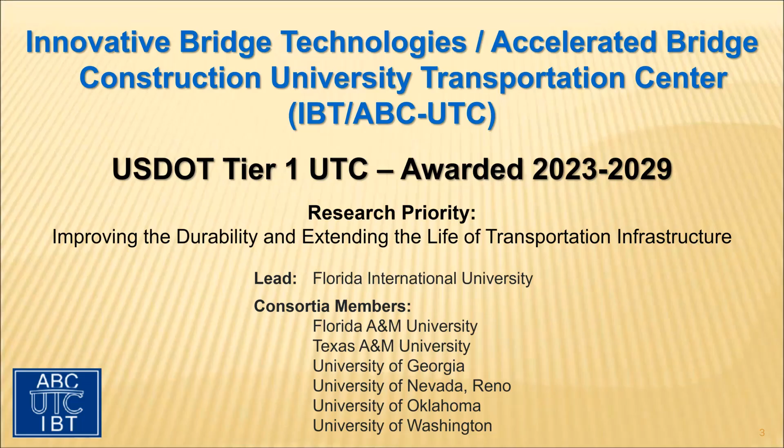Just a couple of quick news items. As we mentioned in the last couple of webinars, we were glad to receive from the US DOT, for the period of 2023 to 2029, a US DOT Tier 1 University Transportation Center award. Our members, as you see on this slide, are Florida A&M, Texas A&M, University of Georgia, University of Nevada Reno, University of Oklahoma, University of Washington, and our partner university.

This time around, we are going beyond ABC. We will be looking at the next generation of ABC, given all this new technology. In addition, we are going to work in the area of bringing in innovative technologies, new ones that we develop or ones used in other industries, and customize them for bridge applications.

So there are some exciting times ahead. Our name is going to be IBT/ABC-UTC. Also, we are making a slight change to our operations starting with the October monthly webinars.

We are delighted to welcome Kathy Kroll, who was formerly with the New Mexico Department of Transportation. She will be handling the monthly webinars, which will allow Mary Lou Ralls to concentrate on the ABC project database. Mary Lou will provide help when needed, but she will focus on the ABC project database that is very popular with bridge owners, and we are going to be enhancing it.

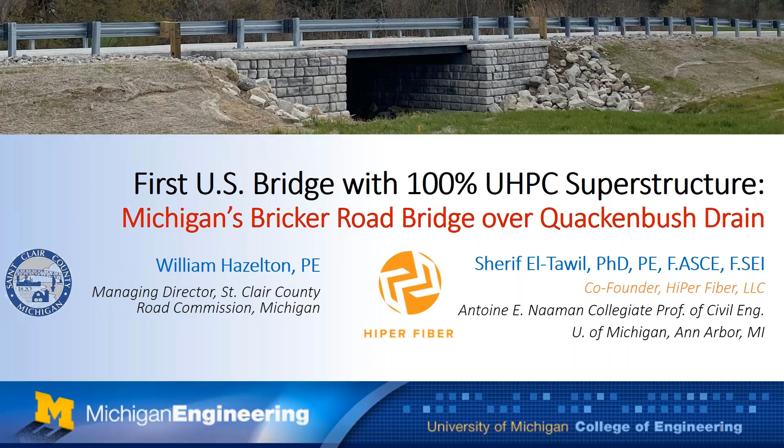Over the years, we've been thinking about UHPC, using it in small doses on different projects, and we felt, why not try this on a superstructure replacement project? In St. Clair County, we have a lot of bridges, probably 235 or so. So this one was easy to find. We found some projects, and we started here.

The history behind it with us is we started this in 2017, using UHPC for maintenance only. We have a large problem with precast units from the 80s, where the connections tend to fail, and then the bridge fails. We have bridges from the 80s that we have to replace, which isn't good for us. So we looked for a more robust connection media, and that's where we started working with Sherif and his team and the UHPC mixture he developed.

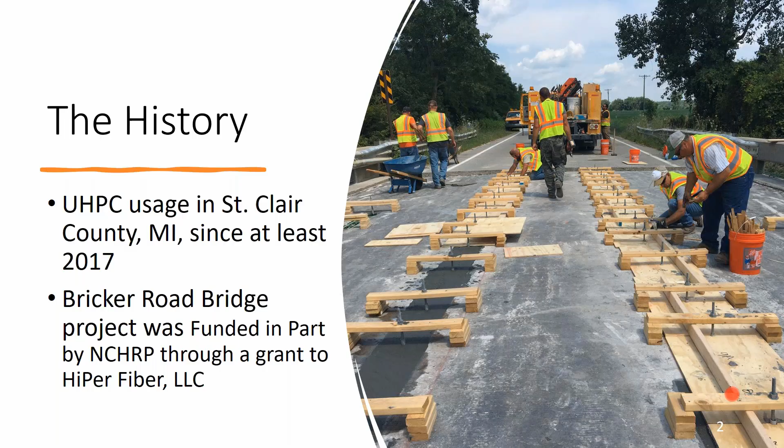Since 2017, we've worked on about 11 bridges. Ten of them were only for joint replacements and things like that, and this is the 11th one, where we started doing a whole superstructure. This project was funded in part by the NCHRP grant, through Sherif's assistance.

So the old bridge wasn't very large. It was dual 120-inch by 80-inch steel arch pipes. The detour route was 3 miles. Flow wasn't crazy, only 290 CFS, but we have to meet the requirements of our local EGLE, that's our EPA division here in Michigan. ADT was 300 vehicles per day. We have our own structural designer in-house, but we did get some consulting help from TEG.

One of the problems we have, ultimately, is the span of this thing, because we have to find a way to put guardrail posts on it. So we capped the length at about 25 feet so we could do a long span guardrail here in Michigan, and the posts are off the bridge. With this project, we prefer to do ABC jobs now anyway, so this worked out good with the panels.

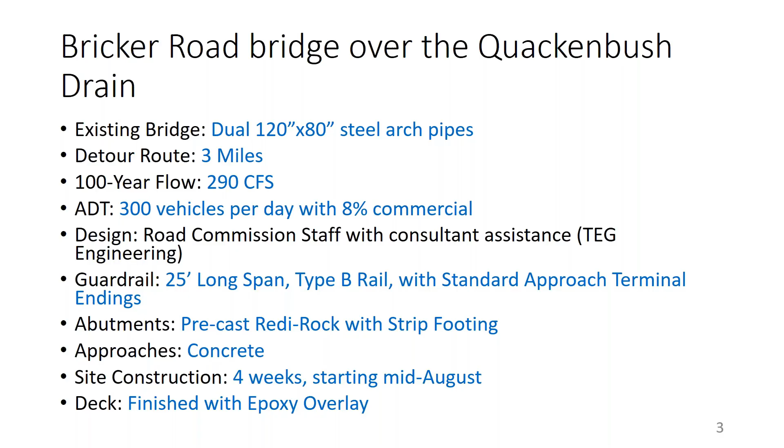We also used the precast Redi-Rock blocks with a strip footing. Again, ABC - but the approaches were concrete, and we had to wait for those to cure, so that wasn't ABC. Ultimately, the construction took about 4 weeks. We had a holiday in there too, so we had a week or so off to let the concrete cure, which worked around the holidays. In the end, we finished off the bridge with the epoxy overlay over the whole thing.

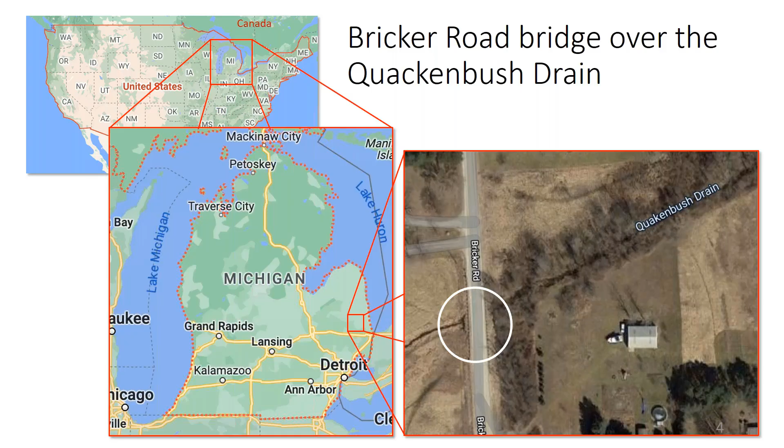Here's the location of the bridge. It's in Michigan, just north of Detroit, probably about half an hour away. It's a gravel road located near the border to Canada. It's a local gravel road - it doesn't have high traffic, but it is important to the local area for farming and just moving goods back and forth.

So this is a picture of the finished bridge. You can see the Redi-Rock blocks - they have a nice aesthetic view to them. And then below the guardrail there, those are our precast panels that we developed with Sherif and TEG and installed. In the end it worked out pretty nice, and aesthetically it's got a nice look to it that our guys are very proud of when we built it.

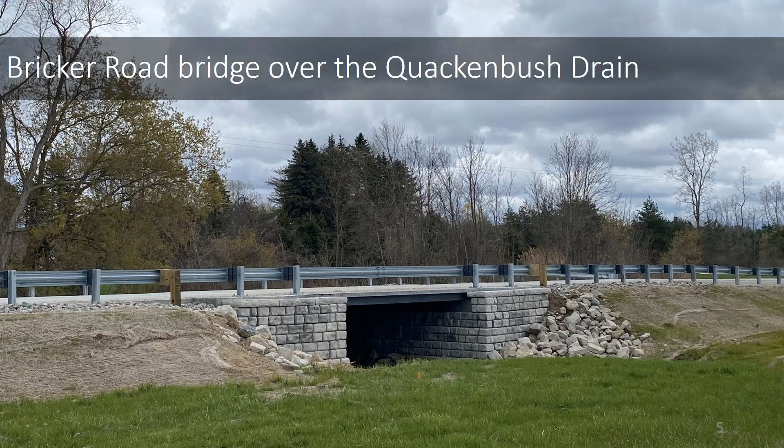With this project, we were also able to secure an award for short span bridges recently. In the end it turned out really well, and I think that deserved the award.

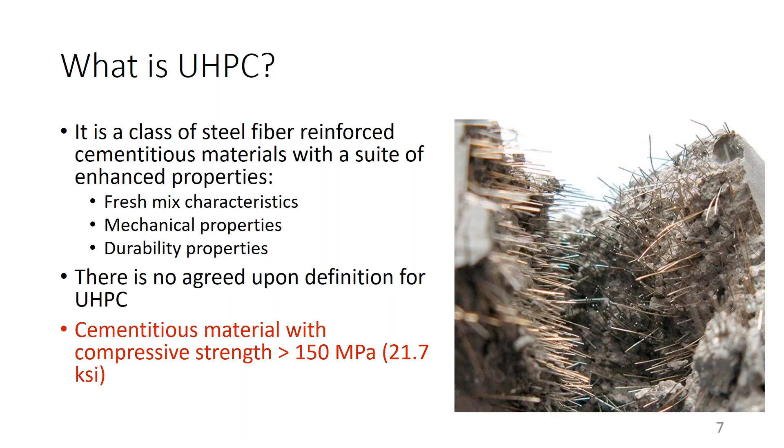It's a class of cementitious materials. I think of it as a next generation concrete that has a suite of enhanced properties - these are typically fresh properties like flowability, mechanical properties like strength and toughness, and durability properties. There's no agreed upon definition for UHPC, but there's general consensus that if you can achieve 150 megapascal, which is about 22 KSI, you have a UHPC.

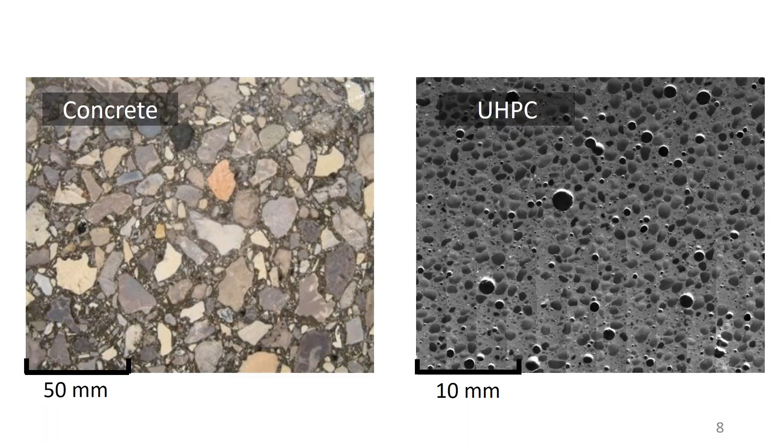So why is it such a unique material with unique properties? Well, it's because of the high packing density. There are two sands in the material, and they fit such that the small particles of the fine sand fit in between some of the larger sand particles. In between that fits in the cement particles, and in between that fits in the silica fume particles. This packing density is quite high, much higher than regular concrete.

Another reason why it's so successful is because of this discontinuous pore structure. If you look at the slice on the right, you can see the 500 micron range at the bottom there, and you'll notice that the pores are not connected. The discontinuity of the pores is one of the reasons why the material is so impermeable to water. And if you kill the water cycle, you basically kill the freeze-thaw cycle and you get this exceptional durability.

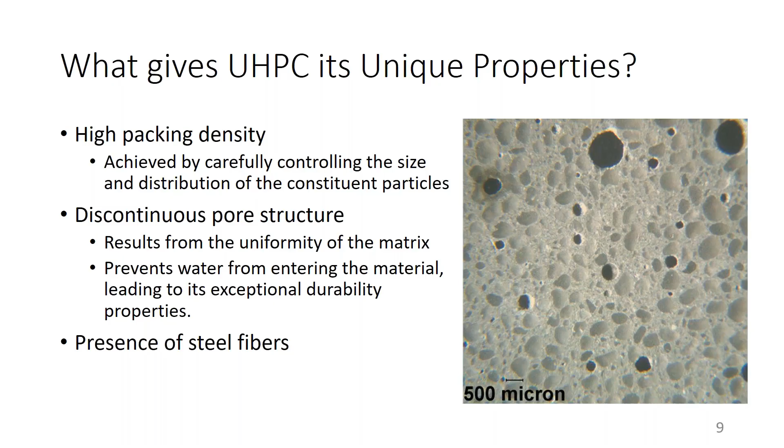The third reason is the presence of steel fibers, because that influences the mechanical properties of the material. The fibers are not an option in UHPC - you have to use them, and basically their purpose is to hold together the material. They make it so that if it tries to crack, the fibers grab it together and hold it together. They promote something called strain hardening behavior, which I will explain in a second.

In order to get these benefits, you have to ensure optimal bond between the fiber and the surrounding matrix. If the bond is too high, the fiber will just break, and all you've done is waste the fiber—you've increased strength slightly, but no ductility. If the bond is too low, the fibers will pull out, again with limited contribution. So it has to be just right, and if you get that correct, then that's when you have UHPC.

On the right, here's an interesting statistic: a cubic yard with 2% fiber by volume—that's how we measure it—has 37 million individual fibers. If you put them end to end, that's 300 miles of wire chopped into half-inch pieces.

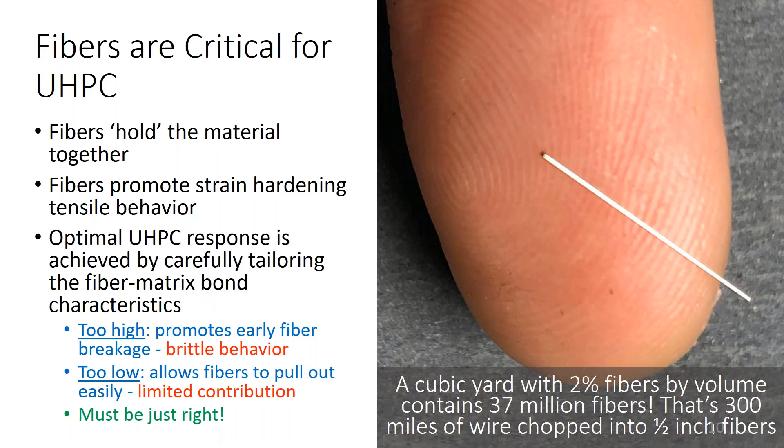With so much effort, you must have really high expectations, and indeed you should. Looking at the tensile response, which is one of the key properties of UHPC, you can see concrete at the bottom left. Once it cracks, it loses all ability to support load and drops right away.

But UHPC is different. The first crack forms, and the fibers say, no, I'm not going to allow you to fail, and they bridge it. Then another crack happens, and a third, and a fourth, and a 20th crack. We call this behavior strain hardening, or the multiple cracking phase—the material does not fail upon first cracking.

However, as you keep loading it, inexorably, one of the cracks—the fibers there, for some statistical reason—will not be able to support the load. They start to slip out, and when that occurs, you go into the softening regime. So first is the elastic strain hardening phase, which is quite extended, and then strain softening. The transition between strain hardening and strain softening is called the localization strain.

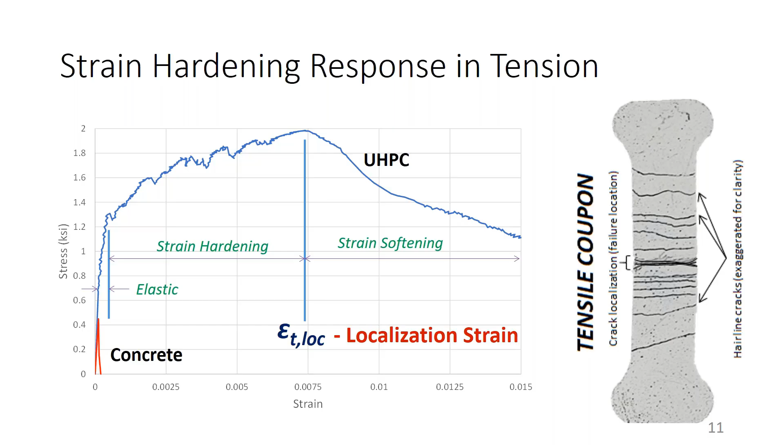Please remember this word, localization strain, because I'll be using it quite a bit later on. You can see that the localization strain is about two orders of magnitude more than that of concrete—in the range of 50 to 100 times. The toughness is many orders of magnitude greater as well.

This is a picture from a test where you can see the localization strain. You can see the fibers that were trying to sew it together, but they couldn't, and failed. If you look carefully, you can see very fine hairline cracks fanning around this particular crack—those are the types of cracks I mentioned.

If you remember in undergrad school, when we took reinforced concrete design, we know that concrete cracks. You have a number of large cracks under service conditions. We were always told that's okay, and it certainly is. But of course, they're large enough that we do have ingress of moisture and chloride ions, as you can tell from many of the bridges you drive under.

However, UHPC does have bar reinforcement—some people might think it doesn't, but you do need bar reinforcement. The difference is that because of its cracking process, you have a dense set of hairline cracks that are so fine they inhibit moisture and chloride ions from reaching the reinforcement. That's one of the big benefits of building with UHPC.

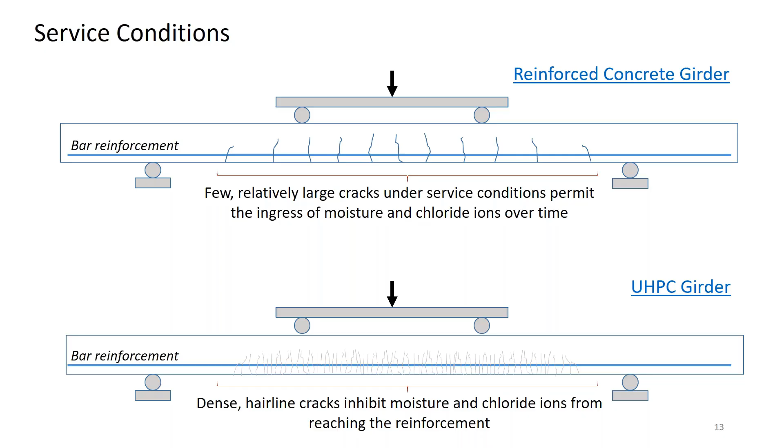In a way, I almost think of it like a pre-stressed concrete member, although of course it's not. And you can pre-stress UHPC members too.

Something pretty momentous happened a couple of months ago: the AASHTO Committee on Bridges and Structures approved the guide proposed by the Federal Highway Administration under the leadership of Ben Graybeal, one of the panelists. I think this is really important and will broaden the use of UHPC in the US. One other interesting thing is that this document imposed performance requirements on the tensile behavior of UHPC, because that is so critical to the response.

Remember this localization strain that I mentioned a second ago? This was approved unanimously. I was there at the meeting, and it was very interesting that happened—a few questions here and there, but in the end, unanimous approval.

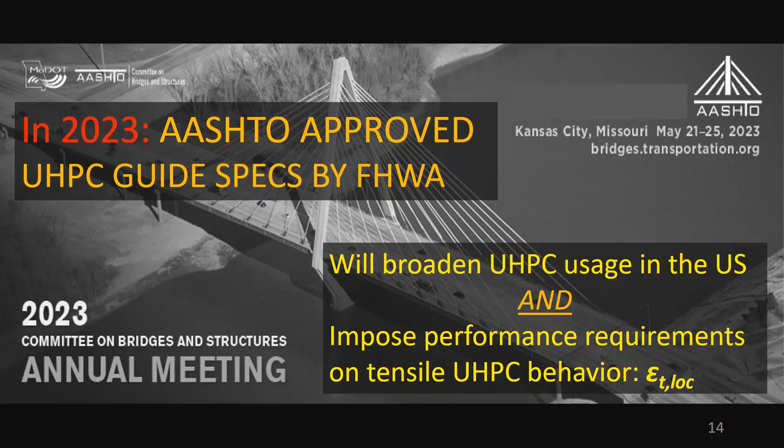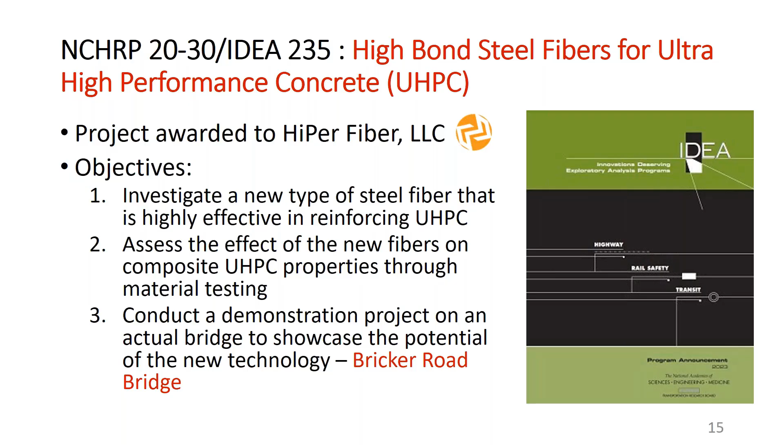So with this long introduction to UHPC, I'd like to come to the project we're here to talk about. This was funded by NCHRP 20-30 under the IDEA 235 project. The project title was High Bond Steel Fibers for Ultra High Performance Concrete. The award was to the company HiPer Fiber, and the objectives were to investigate a new type of steel fiber being produced by the company, assess its effect on the composite properties of the material, and conduct a demonstration project—that's the Bricker Road Bridge project that I'm here to talk about.

Now, the reason this was funded is because of the type of fibers that are available. HiPer Fiber makes these striated fibers, meaning the fiber surface has striations in them. They are just microns deep and microns wide, and you can barely see them. In most cases, you cannot see them unless under certain light conditions.

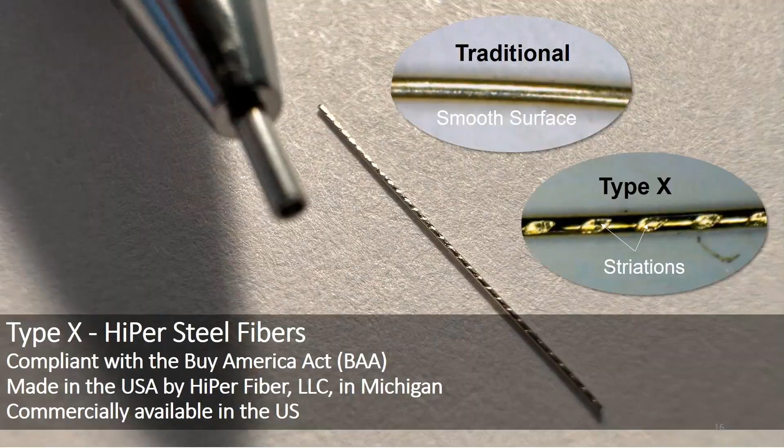These fibers are compliant with the Buy America Act. They are made in the US and they're commercially available in the US. But I don't want this to be about HiPer Fiber as a company or anything like that. I just want to talk about the bridge itself. But you had to know what went into it.

As Bill mentioned, this was a total bridge replacement project. It was 24 feet by 36 feet wide. It had new precast block abutments and wing walls. What was unique about it was the triple T UHPC deck panels that I'm going to talk about. These were truck mixed using an open recipe, which I'll talk about in a second. So this is kind of a preview of the presentation. They were precast and cured at a local precaster, and assembled in the field by the county workforce.

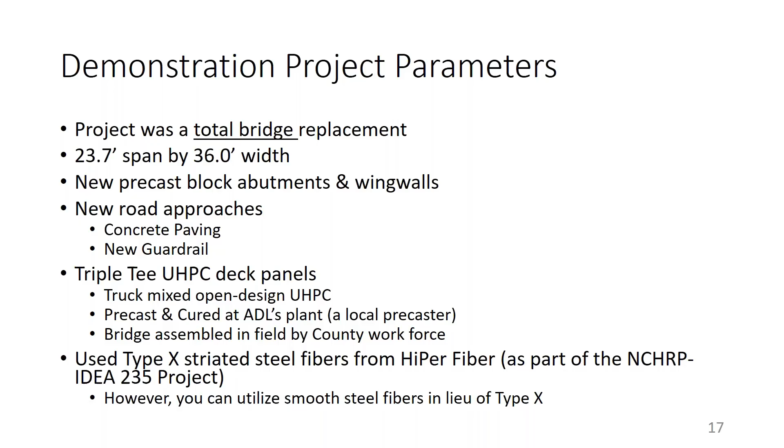The Type X fibers that were used could be replaced by generic smooth steel fibers. You could do that, and you should keep that in mind as we go forward. There is a part towards the end where I talk about specific capabilities of this type of fiber, but for this particular project, you could have replaced them with generic steel fibers.

This is the mix that was developed for the Michigan Department of Transportation in 2014. It has been used now in numerous projects and is the basis of many non-proprietary mixes developed around the country. You can see that it's made up of cement, slag cement, two types of sand. Remember where I mentioned one particle fits inside the others, silica fume, water, and a high range water reducer, and of course, the steel fibers.

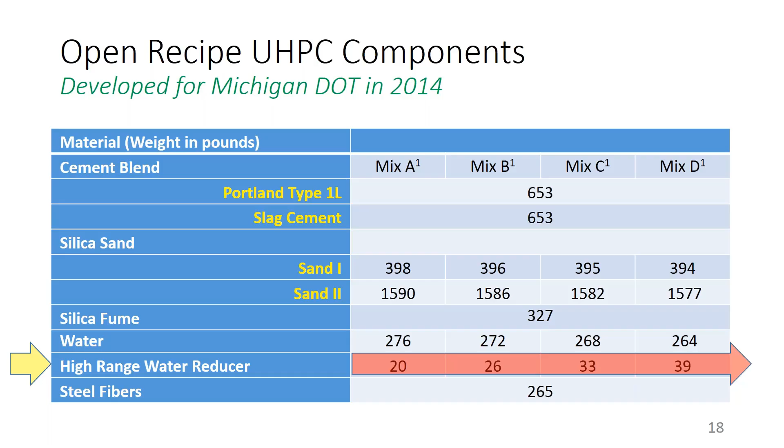There are a range of mixes, it's a family of mixes, and the main difference between them is the amount of super plasticizer that you could use. So you first start with mix A and work yourself up until a mix that works in a batch situation.

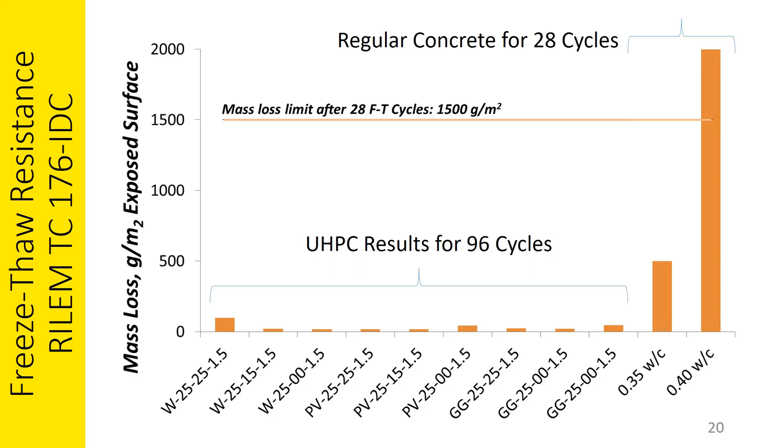From some of our earlier research on UHPC, this is the freeze-thaw test under the RILEM method. On the right, you can see the performance of two different types of concrete. On the left are different mixes made from UHPC, and you can see that the performance is two orders of magnitude less mass loss compared to regular concrete. That's why we think this material has such terrific durability properties. We tested it up to 96 cycles until we got kind of tired of testing it. These are expensive tests to conduct.

So the mixing protocol is one of the things that a lot of people find to be difficult, or think that this is not feasible to do, but it is very feasible. This is the mixing protocol that we used.

We dry mix the material for 15 minutes. Typically, this is actually a function of the truck and where it's going and where it's coming from. In the lab, we typically mix for 5 to 7 minutes, but in the truck, we mix for longer. Then you add the water and high range water reducer, mix them together, and add it in slowly. Then you wait for fluidity, we call it turnover, which happens about 5 minutes after the water is added. You wait another 5 minutes to make sure it has turned over well, and then basically add the fibers.

It says here 10 minutes, but that's really a practical limitation of adding the fibers because they come in bags. So you dump them in one after the other, and it takes a while to do so. Then you mix for another 10 minutes and then you cast.

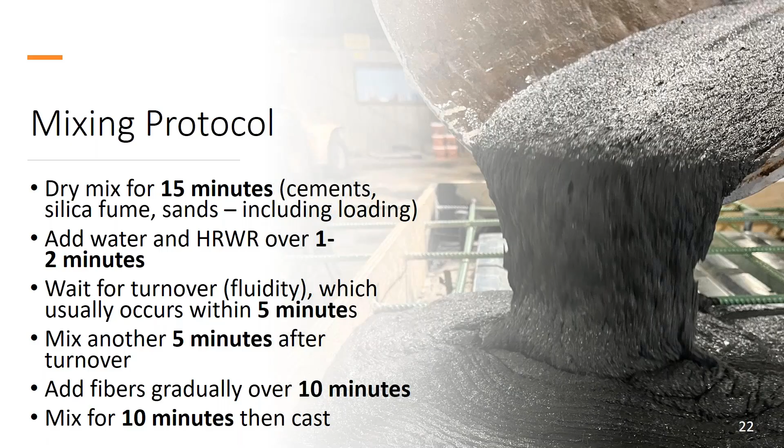This was done in a ready mix truck. At the time we did this, we had never done it before, so we were quite worried whether it would work or not. But thankfully it has worked, and it has worked numerous times since. I'll come back to this topic shortly.

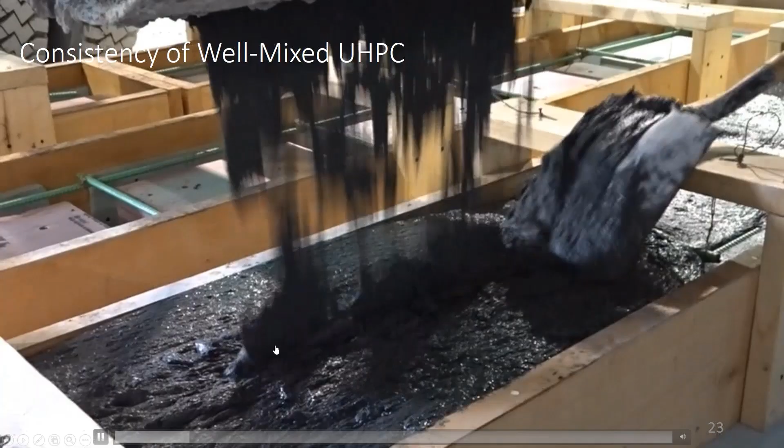This here is the consistency of well-mixed UHPC. I wanted you to see it so you can see that it's quite different from concrete. You can see that it falls in clumps, and that's because of the unique viscosity of the material. It kind of drips in, and you know it's well mixed when it has the consistency of a milkshake, basically.

As part of this NCHRP project, we conducted testing. These are compressive tests, made on cubes. The reason we conducted them on cubes was because the third-party testing company did not have the capability to break cylinders. Testing that Ben Graybeal had done showed that the difference between cubes and cylinders was pretty small. In this particular case, the cubes had a capacity of close to 27.5 KSI.

And a Young's modulus of about 8,700 KSI. Young's modulus is something a lot of people do not know about UHPC, that it's so high. It's about twice that of regular concrete.

That has pretty important implications for pre-stressed concrete design in terms of loss in the steel, especially when you're initially stressing it, and also for high-rise buildings when you are worried about differential movement between the columns as you go up to the 50th and 100th stories. So Young's modulus is a very useful property of UHPC.

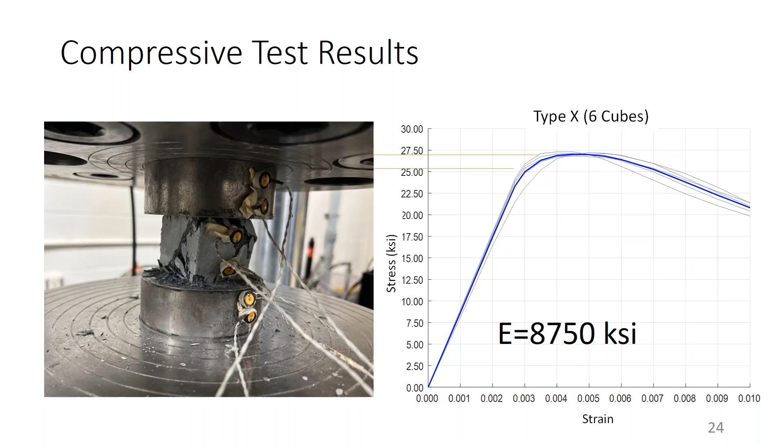In this batch of tests, the localization strain - remember, that's the delineation between strain hardening and strain softening - was 0.43%. Just so you can compare, steel yields at 0.2%. So you can see that the material will continue to remain in the strain hardening range, even well beyond steel yielding. This is an important design parameter to keep in mind as we go forward.

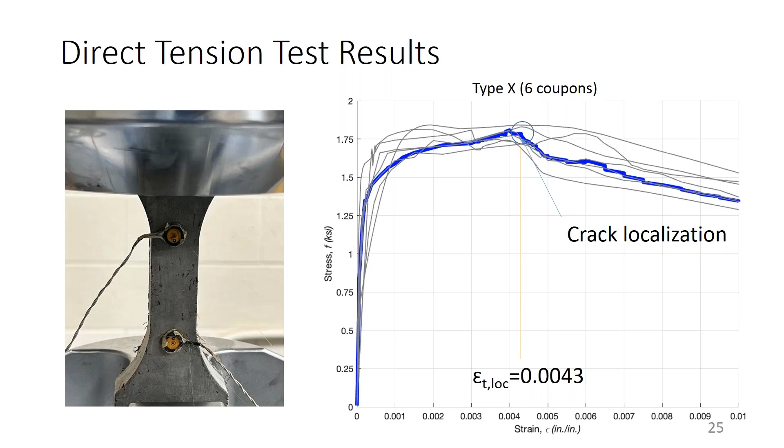Now, when we came to the design, we were a little confused. Should we use the parameters from the tests? Would we be able to get those in the field, even though we'd never mixed this in the field before? Would it mix well in a truck? There were a lot of unknowns, and this was a kind of hair-raising moment, at least for me at the time. So we basically used assumed properties that were a little bit lower than the test parameters we got in the lab. And then we said we would check towards the end from the trucks, and I'm going to show this data shortly.

For example, the compressive strength we got in the lab was 27 KSI. We assumed 21.5 KSI. Going all the way down, the localization strain was 0.43%, or 0.0043. We assumed it to be 0.0025, which is the minimum allowed at the time by the Federal Highway guidelines. By the way, that was not yet approved, so we were kind of using it just for guidance. Also, the tensile strength of the material, which you cannot ignore because it's so high, was 1.82 in the tests. It's 1.15 for the design.

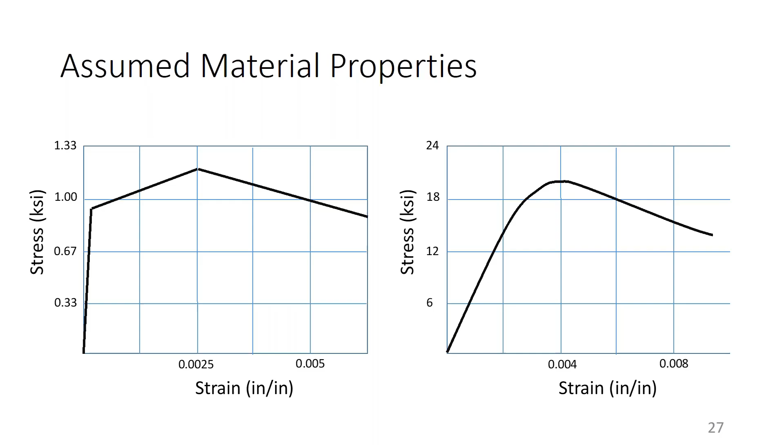Again, remember, when we did this, the guidelines had not yet been approved, so we were kind of on our own. We reverted to first principles to conduct the flexural calculations, and we had to assume certain material properties. This is what we assumed - these are well below what we got from the lab testing.

Then we plug this into a fiber section analysis. A fiber section analysis assumes that plane sections remain plane after bending. You slice the section up into slices, and because you know the distribution of strains - for example, fiber i on the left there, if you go all the way to the right - you can get its strain for a particular level of curvature. That means you can go into the figures I showed in the previous slide and get a stress. If you know the stress, you know the force.

If you know the forces, you can check for equilibrium in the section and then iterate until you reach equilibrium. But once you reach axial equilibrium, you can calculate the moment capacity by getting the differential moment due to every differential slice.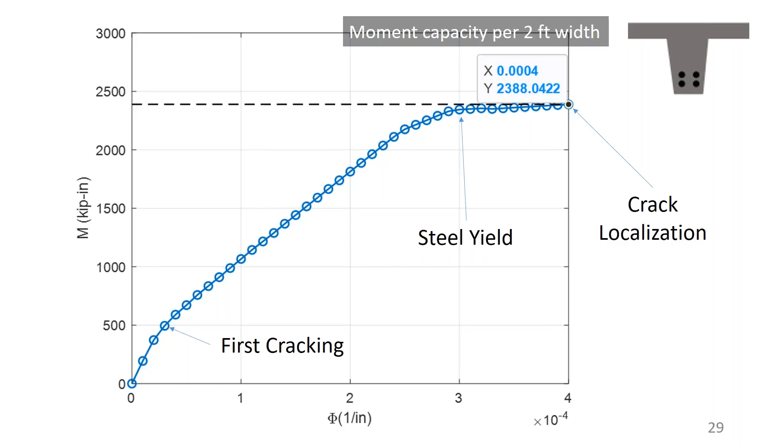You can see some interesting things in the moment curvature relationship. For example, you can see first cracking all the way down here, and you can see the steel yield where it yielded, and eventually crack localization. So that means that under service conditions, the material is going to be operating in the strain hardening region, meaning the very dense, very fine cracking.

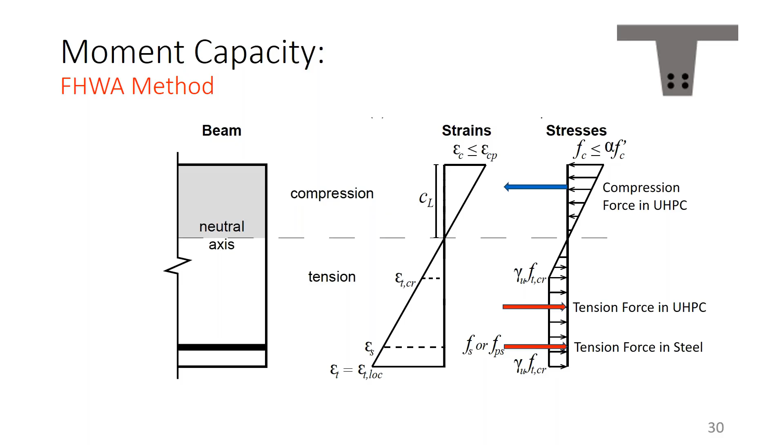We were concerned about this, since we hadn't done this before. We were a little worried, so we also compared to the FHWA method, even though it hadn't been approved, which is also based on compatibility. This is a hand method, similar in a way to the moment curvature relationship I got before, but simplified. You get the tension in the steel, the tension in the UHPC, the compression in the compression zone, check for equilibrium, and get the moment capacity. I won't elaborate since these are basic calculations, but I'm happy to answer questions about this later if you'd like.

So basically, you're relying on the capacity of the fibers to give you the shear capacity you need. In this particular case, we had a strength much more than was required for the demand, and no stirrups were required. Although the designer insisted on adding a few just to make sure the bars could be placed, we did not require stirrups for the cross section.

Punching was another one of our concerns, but we couldn't find guidance for that, so we used a conservative model again from first principles. We assumed the tire footprint, the punching area around it, and using a very conservative model assuming the tensile capacity was a certain value, we showed we had 10 times the capacity for punching in the very thin panels that went up for this particular bridge.

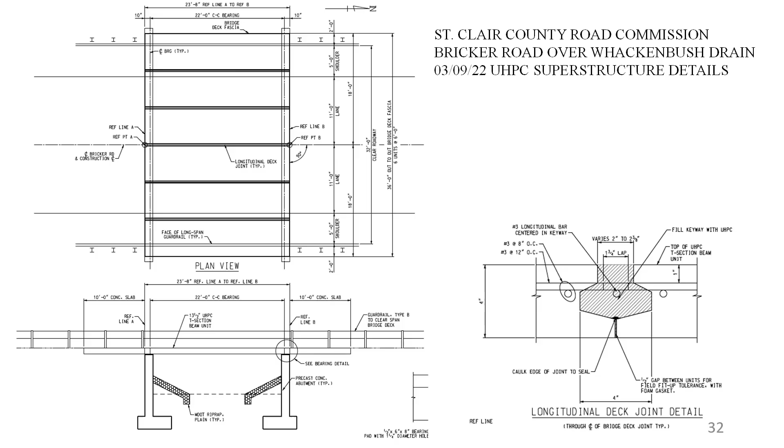That was something we did not want to worry about, because the panel components were so thin we didn't want to overload them. So we used a long span guardrail pre-approved by MDOT for TL2. On the right, you can see the joint, the closure pour, which is quite small compared to traditional closure pours. The reason is the bond capability between the bar and the UHPC is so high. In our testing, for these bar sizes, you could get away with 2 to 3 bar diameters for the transfer length, but in this case we used a much higher number.

to their previous designs. So we have the thin panel on top, which was 3 inches deep, and the stems were 10 inches, 10 and a half inches. So the total depth was 13 and a half inches for the 24-foot span.

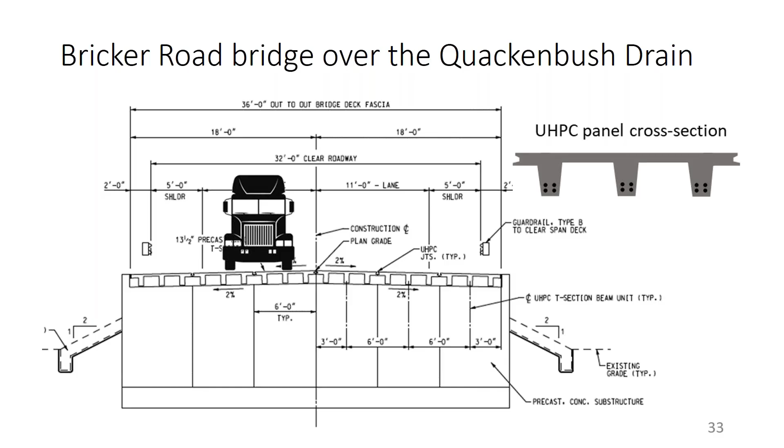This is the cross-section design, showing again the 3-inch typical depth of the panels in the middle. And for experienced designers, this may be a little odd, such heavy reinforcement at the bottom for such a thin deck. That is true, but it's not a concern because the UHPC is so strong in compression. For service conditions, the compressive stress was about 7 to 8 KSI, which is nothing for the UHPC that was used. The reinforcement on the bottom, by the way, those are 4 number 8 bars.

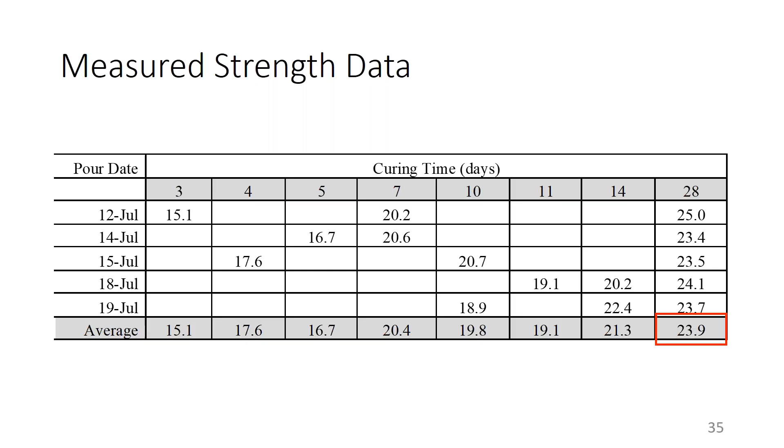If you look to the very left, after 3 days, you get about 15 KSI. So it strengthens very quickly, and then it kind of slows down. After a week, you get about 20 KSI, and it remains steady for a while. By 28 days, it had reached about 24 KSI. So that is more than what we assumed. It's a little bit less than what we had achieved in the lab, and that is understandable.

Now, we weren't really concerned about compression, we were concerned about tension. Will the material that is truck mixed in the field, something that we had not done before, achieve strain hardening behavior? That was a big unknown for us.

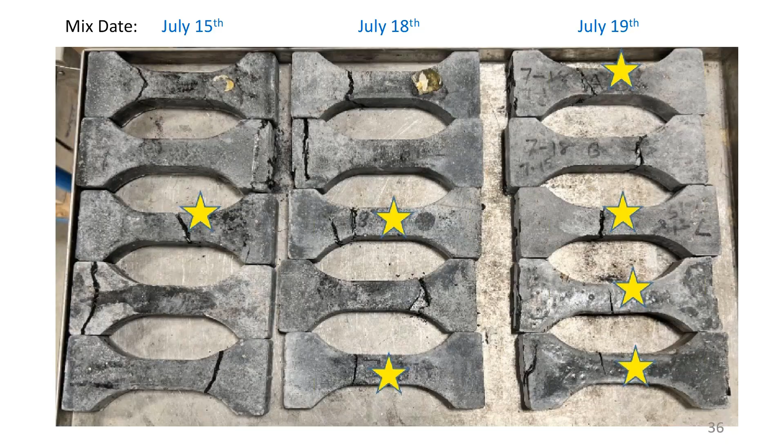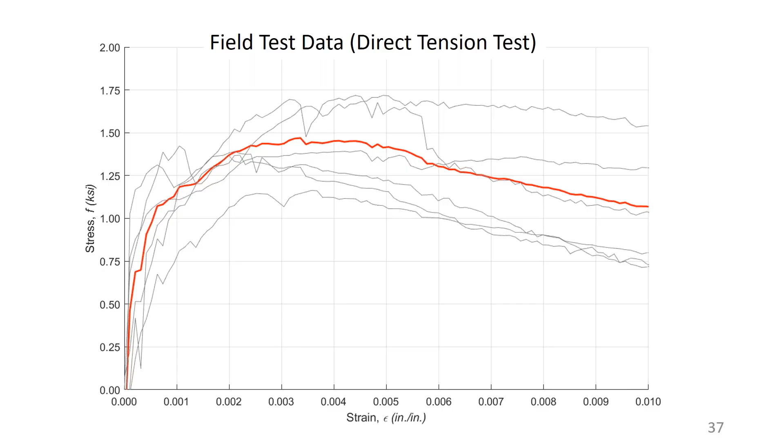Basically what I'm showing here are the tensile results. For me, I was pretty impressed to see this. In fact, the localization strain was higher than what we achieved in the lab, and I'm not sure how to explain that. The tensile strength was lower. Remember, it was 1.82 KSI in the lab; here it was closer to 1.5, 1.4 something. The localization strain was about 5 to 10% more. But the other thing I see is that there's more variability. I'd accept that, I think, because of the way the specimens were made, and because these are field specimens.

So I'm going to turn this over to you, Bill, because this is the construction process and lessons learned, and then I'll take over towards the end. All yours, Bill. Great, thanks, Sherif.

All right, so we'll get into construction a little bit. That's the fun stuff, right? So Sherif dazzles you with all these numbers and figures, which are awesome. So I'll get into the project itself. Here we are, this is on site.

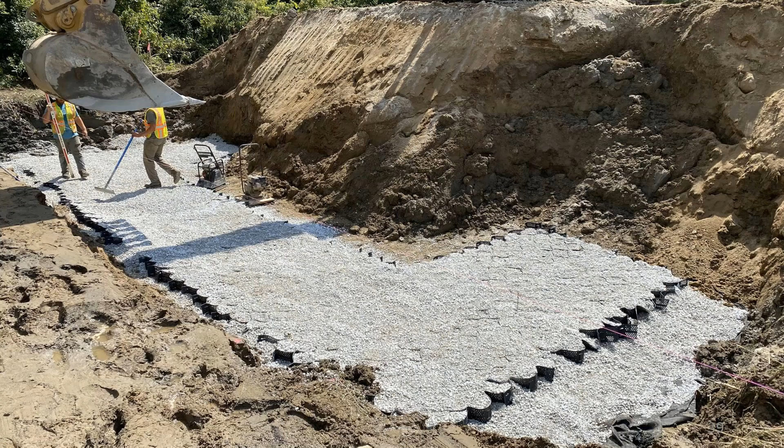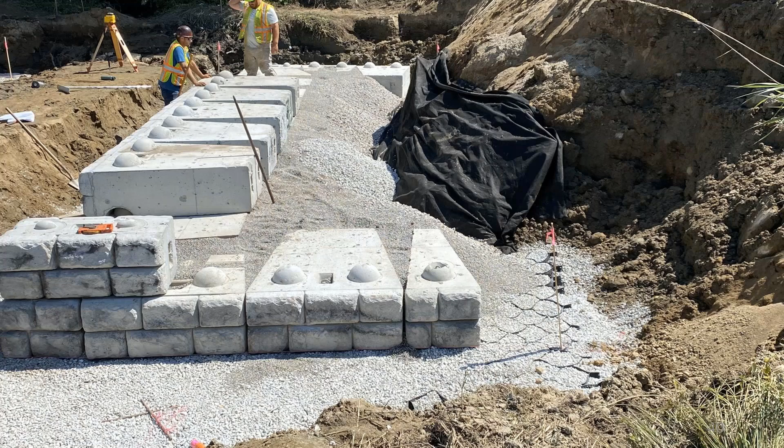We used some GeoWeb under the foundation, which was the Redi-Rock walls. We try to use ABC construction whenever we can, so using geocells with the stone there made good use for the Redi-Rock abutments. Here we are with the Redi-Rock blocks - this was our first time using them. They weren't perfect, but they were pretty good. There was some where the nubs didn't line up exactly correctly, but given the low dead load of the bridge, a lightweight foundation could be used here, like these Redi-Rock walls.

We were discussing during design whether we should design for a traditional concrete deck with steel I-beam, or design for the lightweight panels we're producing. It was agreed upon that we would design for what we're putting in there and not assume a failure in 10, 20 years - assume that the UHPC, which we have confidence in, would last a long time.

So here it is, here's the form.

Initially this project cost probably a little bit more because the UHPC has this particular design, and the precast plant was a little concerned at first, not knowing if they'd ever do this again. So the cost of the panel was absorbed by the project. We are doing some more casting at that plant now, and the cost to cast these things has calmed down substantially because he has the form and can use it over and over again.

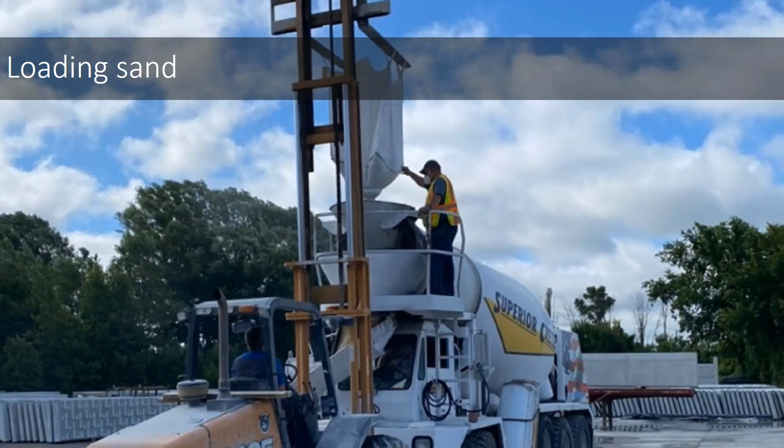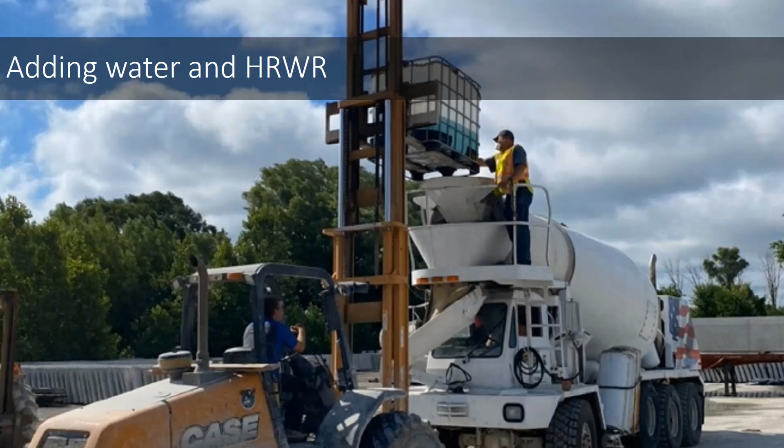So like Sherif talked about, we used a ready mix truck at the plant. We bought the materials mostly in super sacks. Our guys had no problem mixing it. This was the first time we'd actually mixed it in a ready mix truck, we've done small batches in paddle mixers before. A day or two in, it was like clockwork, it was normal.

So here we are again, adding the water and the high range water reducer. We do have a problem sometimes where we want to add ice. On this project we cast in July and it was getting warmer, so we replaced a lot of the water with ice. This material heats up fast and starts curing quickly, so where Sherif's design calls for pounds of water, we replace a lot of those pounds with ice. It helps us work it and get it in a little faster.

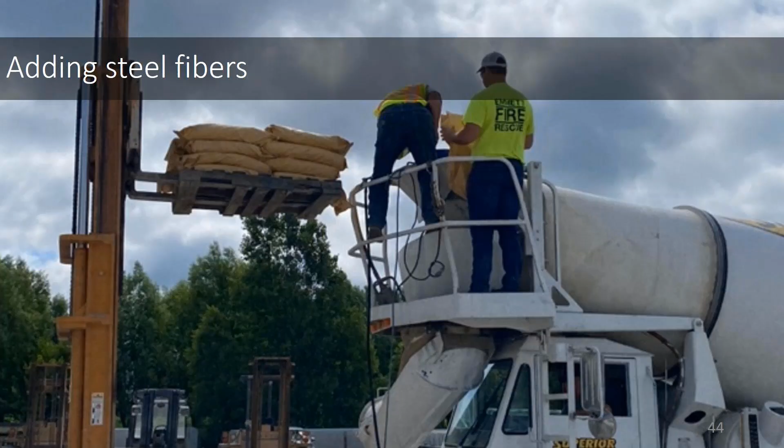The steel fibers, this is one of the things that takes a little bit longer. Once we know we have the right slump, we look at the truck, most trucks have a flow meter and a pressure meter, so we watch that and the flow meter. Once it's the right fluidity, we start adding the fibers. As you can see in the truck, there's a small blue barrel on top of the chute with a little vibrator on it. The steel fibers want to lock together, so if you dump the bags in, this vibrator shakes that little screen and helps the fibers separate and go out throughout the truck.

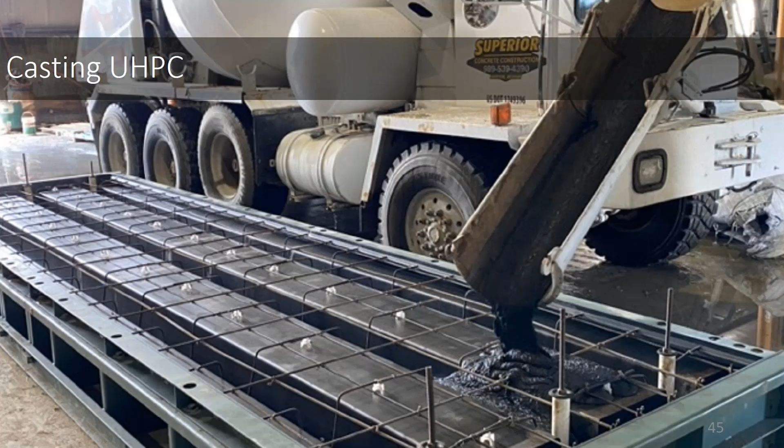So here we are at the plant. We mixed all materials outside and then just pulled right in the door and cast the panels. So it's running out just like normal.

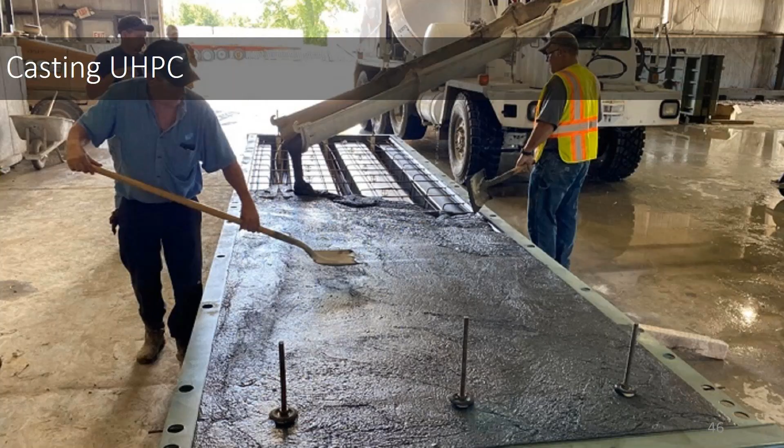After day one, we learned a lot. This first panel we cast, the guy spent 3 hours pulling the actual panel out of the form. Day two, we tried to pull it out, they spent 3 hours and said we can't do it. So they did some slight modifications to the panel after the first day, and every day after that, the panel came out of the form rather quickly.

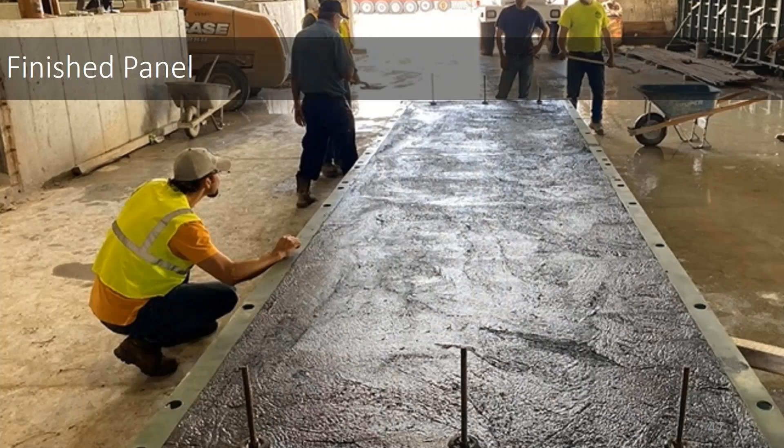So here it is with the fully cast finished panel. It only takes about 25, 30 minutes for the mix to be in there. It's self-consolidating, so you're not vibrating it, because if you vibrate this material, you change the striations, the orientation of the steel fiber. So basically it'll smooth, it'll flow. The top surface has got a little skin to it, and it's not perfect, but we've learned to work with that in the end.

For curing purposes, we just wrapped it in wet burlap and then visqueen, wrapped for a day. Next morning about 7 o'clock, they came to the plant, unhooked it all, and it was curing away. We actually cast our coupons in there and left them in the same curing environment so we could mimic what was going on. That's why we cure them there at the plant and then took them to the lab to be broken.

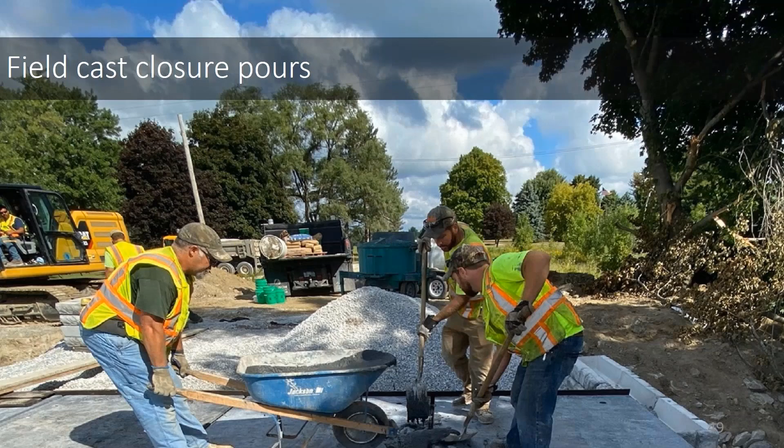On site, you can see that little turquoise mixer, that's our paddle mixer. We've mixed this plenty of times on site, so this was easy for us. The joints are super small, which we love. This stuff doesn't want to run, but if you have large joints, FYI, this stuff will push through your joints and through your forms and run out where you don't want it to go. So really the forming for this has to be watertight because it will run, and you'll have a mess in your hands.

So as you can see, here's the 3-stem bridge unit.

It's almost like double T beams. I'm sure a lot of people across the nation have those. This is a triple T, and it is slim, it's durable, and the weight savings is incredible, which helped us with the foundation and the footing for it.

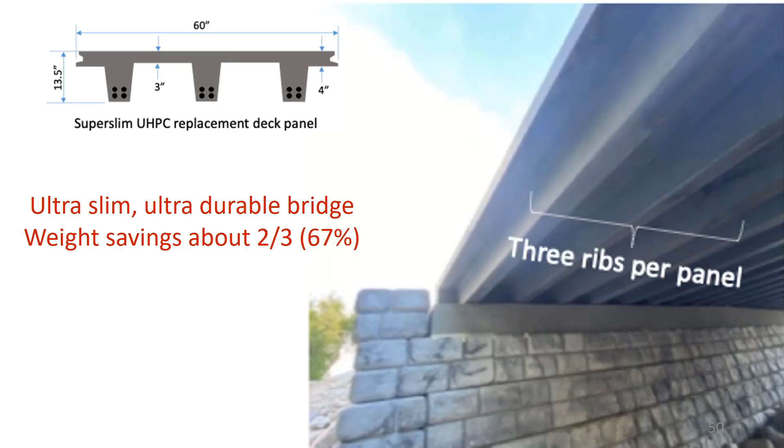So again, here is the finished design. You see the guardrail clear spans the bridge, which is one of the factors we talked about—just getting the amount of reinforcement in the bridge deck to make the guardrail work. Something we don't want to explore at this time, so we'll probably look at that in the future with these precast panels.

So here we are with the savings. Mike Clark is our bridge engineer, myself, and we looked at—we don't just always go to UHPC in these structures. We use wood, we use aluminum boxes, we use steel boxes, we use arch pipes. We go after everything, so we don't have a one-size-fits-all solution.

Every solution is a little different. So basically, we came up with the MDOT scoping spreadsheet based on this length, the bridge deck size, and that. They estimated the bridge would cost about $560,000. We didn't go through and design the whole bridge and estimate it at $560,000—we used their standard scoping spreadsheet, which adjusts every year, and that's where we got the numbers from. So our cost was about $380,000, all said and done.

So like I said, we did all the excavation. We poured the concrete. We actually got the panels from a precast facility in Lansing, about 2 hours away. So we were there every day for about 8 days pouring these things. In the end, you can see that we saved about 32%.

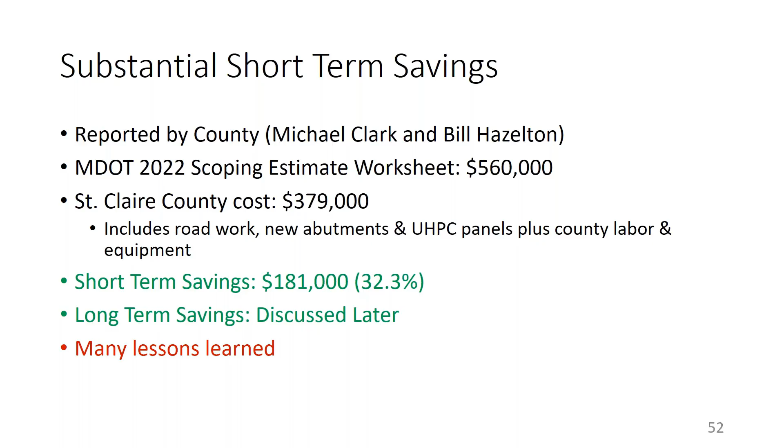In the end, the long-term savings is what we're trying to capture, because we're here tomorrow, but who do you know is going to be taking care of your bridges in 10 years, 15 years? We don't know that. So we're trying to create a structure that will last 100 years with minimal maintenance, because we've had some years of bad maintenance in our agency, unfortunately. You have a couple bad years of maintenance, and then you have some failures, and then you're on borrowed time with your bridges. So a lot of things I've learned with this, and we're getting better with this material every time.

Alright Bill, I'm going to take over. I have a few more slides about what has happened since this bridge and with the lessons that we learned from it, from Bill's team, and from other Michigan projects as well.

So at the same time as that bridge was going up, this bridge was also going up too. This is the first bridge in the US in which the UHPC deck is composite with steel tub girders. Again, 6 panels side by side with closure pours between them. The deck itself is 3 inches at its thinnest point, with stems that were 3 inches.

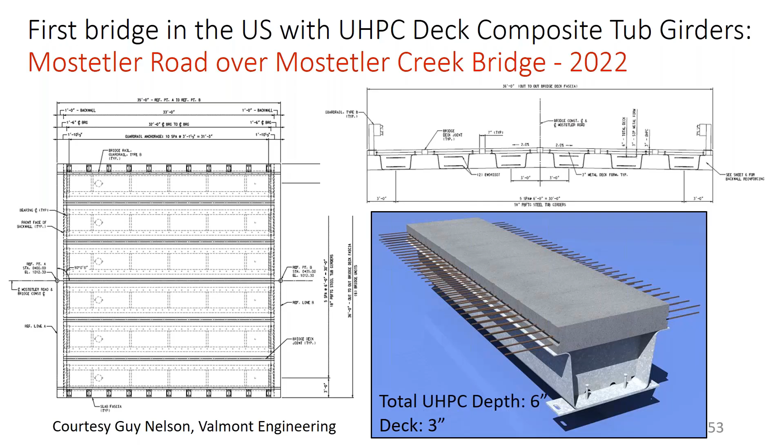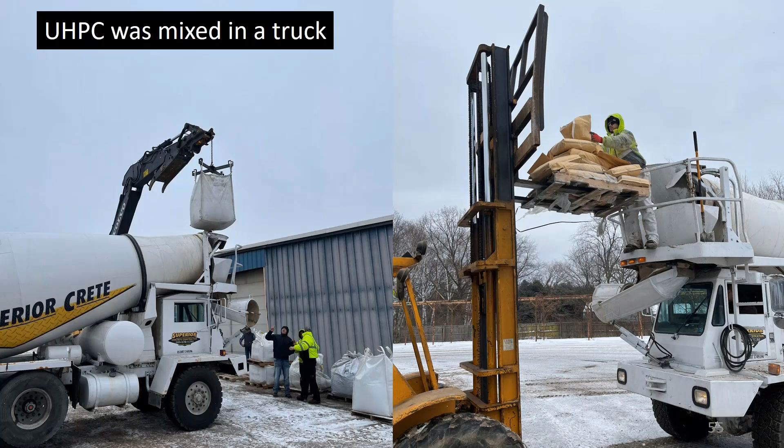Again, the process was done through truck mixing—there's a lot of experience by then. You can see on the left the sand going in, on the right the steel fibers going in, the girders being placed side by side. You can clearly see the closure pours, the construction site from above.

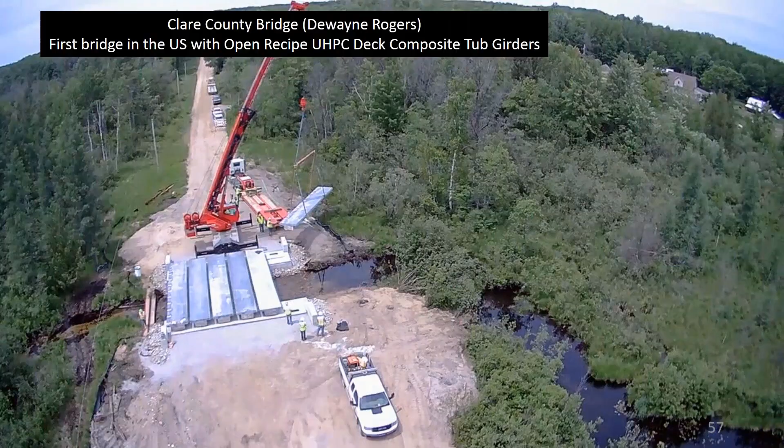Okay, this was a bigger stream now than the other one, and a longer span too—this was about 35 feet long. And from the bridge designer, Guy Nelson at Valmont, he was saying that the lightweight of these units was very helpful for the design itself. He estimates that the precast bridge units required only a third of the concrete in a conventional bridge superstructure and less than a quarter of the weight of a concrete PBU. Basically, terrific savings in terms of the weight, which translates into big savings in the overall structure itself.

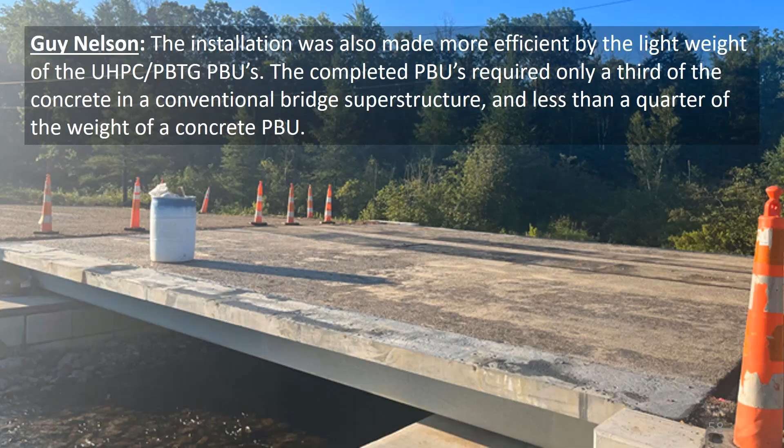He estimates a 100-year maintenance life for the tub girders, which are galvanized. And of course the deck itself is also going to be very long-living because of the high durability of the UHPC. So this is the finalized structure—this is the actual data. The MDOT scoping worksheet was $790,000.

The Clare County bridge cost - Dewayne was the person doing this, and he's one of the panelists. His cost was $534,000. The short-term savings were about 32%. It's just a coincidence that it's very similar to the other one. Based on what he said, he could have saved more, but that's the learning curve.

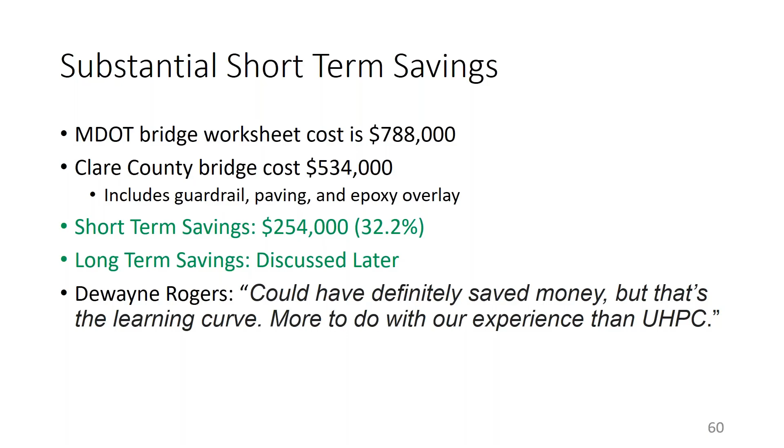I'm going to show you another bridge in a little while where the savings was more. Dewayne is one of our resident experts now in UHPC. This is the Athey Road Bridge, done using the same type of system.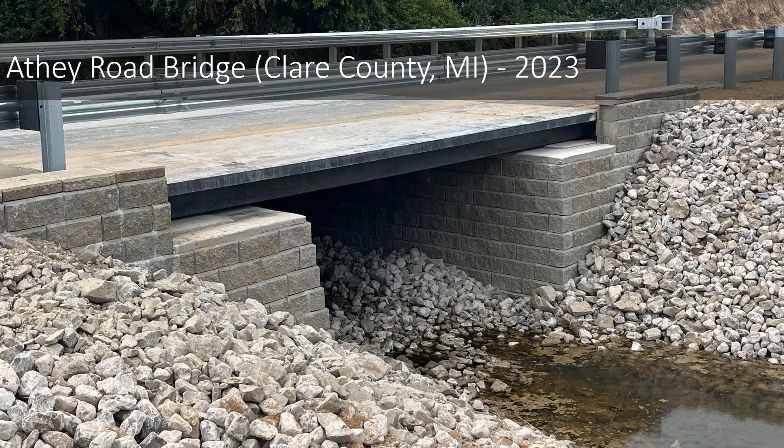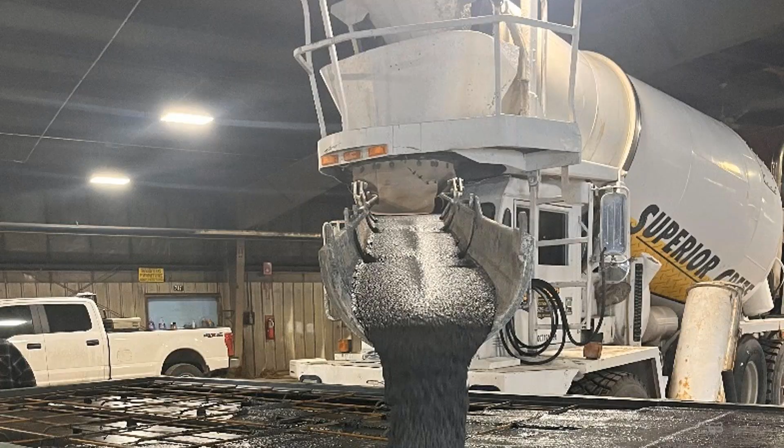For the Athey Road Bridge, you can see it's a small stream in this case. Cross-sectional view, again the three stemmed panels. On the bottom, the heavy bottom reinforcement and the very thin deck made of UHPC, the very small closure pours. And again, the concrete coming in from a truck, with substantial short-term savings.

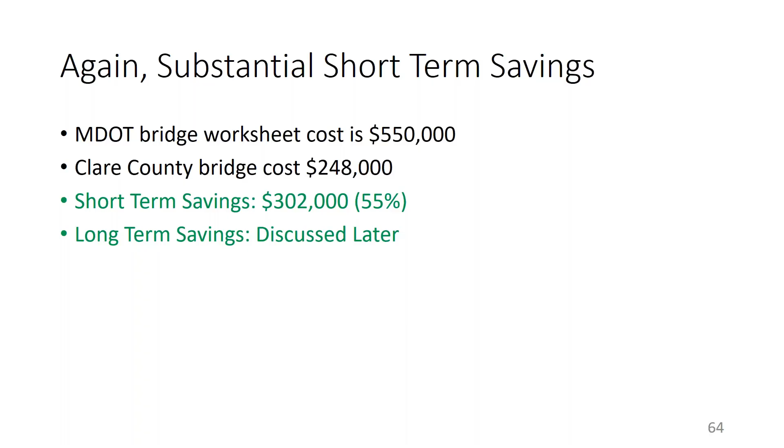Dwayne made good on his promise - the MDOT scoping worksheet was $550, his cost was $248, a 55% savings versus the 32% before. But really, this is not only about the short-term savings, but the long-term savings, which I'd like to discuss in a minute. One more bridge, the Gratiot Road Bridge over the Moog Drain.

Same type of cross-section being used, very similar to what we had before. Wait a minute, this is getting boring - they all look the same, right? Except right now, this is the newest bridge. This is going to get cast this summer.

By the end of August, we're going to use a quarter less fiber usage in order to save on costs. Going back to the NCHRP data, the test data showed that type X was more advantageous in terms of localization strain compared to the smooth fibers. So even though we could have used generic fibers for the Gratiot Road Bridge, we decided to go a little less in order to show we could save on costs and make these even more economical.

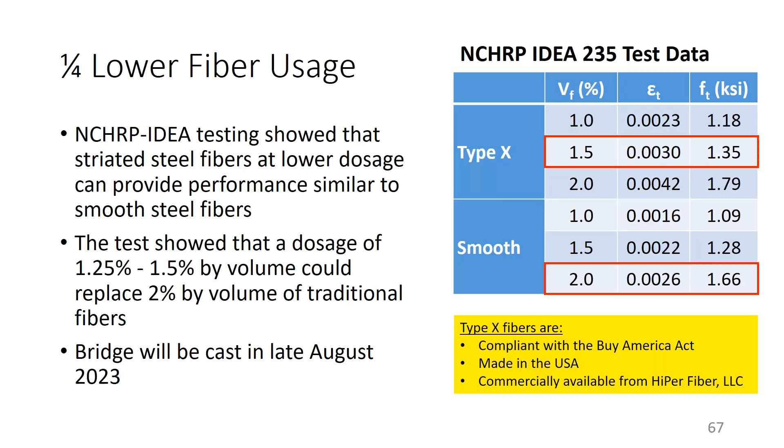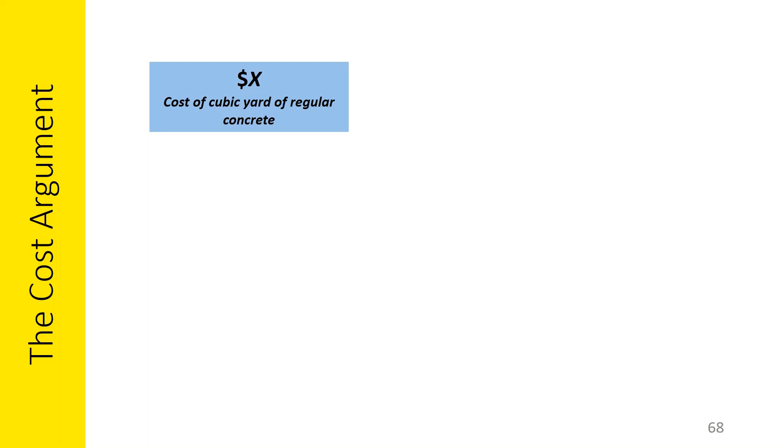In my final few slides, I want to mention a couple of things. If you put a cubic yard of concrete, which is maybe $200 now, that does not exist in isolation - it exists with many other costs. That's our cost as an engineering community, the construction community costs, transportation, all of these things. Those numbers range from 3x to 7x, based on a paper I wrote with Dwayne and others a couple of years ago in Concrete International.

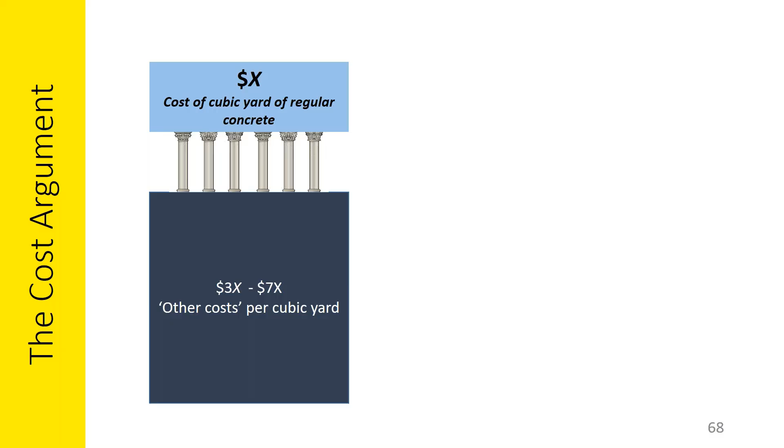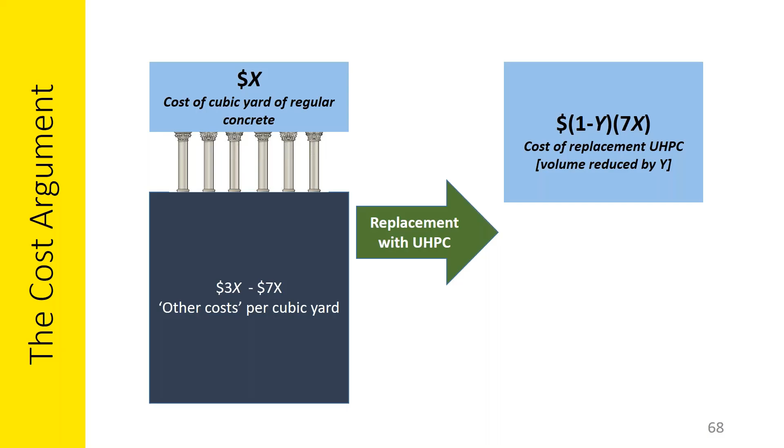Let's replace this with UHPC. Well, the material is more expensive, but you're using a lot less. If you remember, Bill's bridge had two-thirds less material. So even if the material is 7 times as expensive, which it is about that number, then yes, the overall cost of a cubic yard is more.

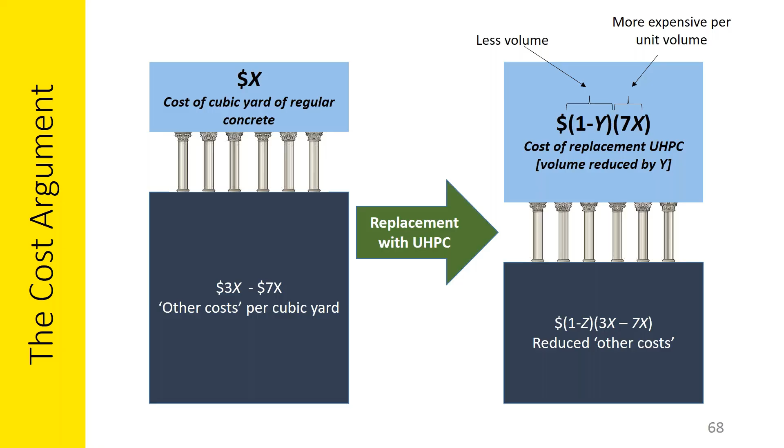But because it's so light, you do not need pile foundation - you might need the foundations that he showed. Transportation is cheaper, you don't need a crane. In his case, he did not hire or rent a crane - he basically used the backhoe to lift the panels. So all of these are savings that go into the other costs.

And of course, the real opportunity for cost savings is the long term. When we put in our regular concrete structure, after a little while it needs some maintenance, and then you get sick of the whole thing and replace it. I'm being generous here that over 100 years, you replace it only once. We think that UHPC, with the test data we have, will not need a replacement in 100 years, maybe even more than that.

Michigan has been a pioneer in UHPC technology. A lot of this can be traced back to MDOT research done in 2012 and 2016. It's host to many firsts - the Bricker Road Bridge, which I just showed. In fact, the very first bridge to use an open recipe UHPC was in St. Clair County in 2018. Going down the list, the first bridge to use 1.5% by volume steel fiber dosage is coming up in 2023.

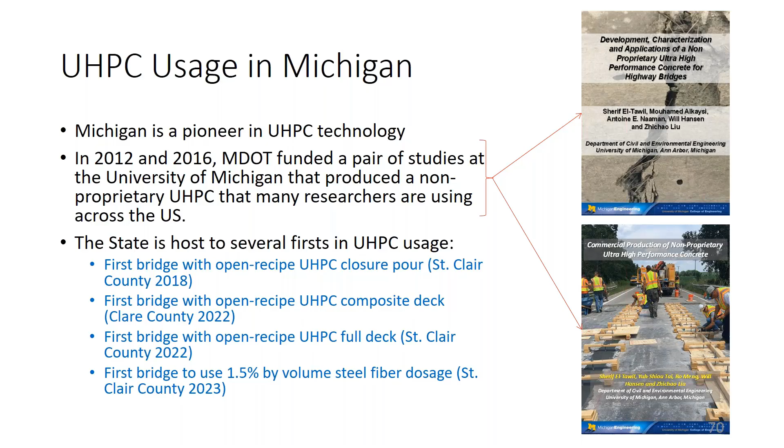So some final thoughts about the cost considerations - the cost of open recipe UHPC, which I know many of you will be interested in. Those numbers from Dwayne in St. Clair County are $1377, and from Bill $1675 per yard, in 2023.

These are actual numbers, and they've risen dramatically because of inflation. In 2019, when we did the bridges, the cost was $890. This includes the fiber, which is Buy America compliant, and all the components of the material itself.

But UHPC provides cost savings, not because the material is cheaper, but because if you change your thinking and take it into account from the beginning, you have these new opportunities. So you do have opportunities for short-term savings in spite of the high material cost — cheaper transportation, cheaper handling, no camber in many cases, smaller cranes, smaller substructure.

And the long-term savings are also extreme because of the durability — minimal maintenance, extremely durable decks, significantly lower replacement costs. Overall, we think that UHPC for certain applications is a no-brainer, and we should explore this more for building our infrastructure. UHPC presents a compelling case, and we've shown in the bridges I just described, close to my last slide, the 32% savings.

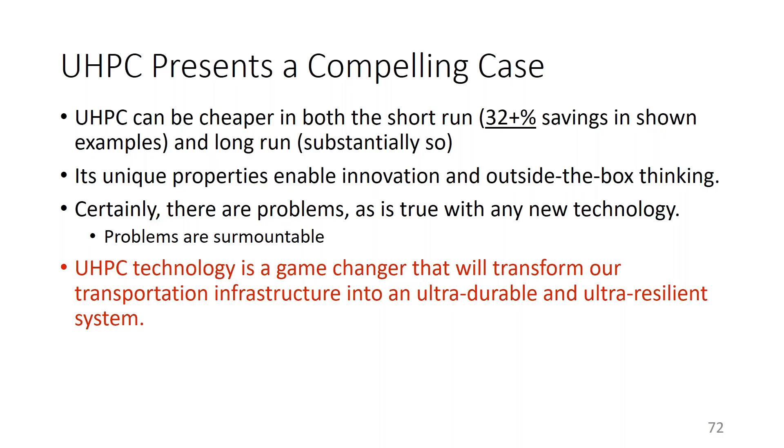It is a unique material that enables outside-the-box thinking. Certainly there are problems, as with any new technology, but these problems are surmountable. You should not be afraid to use it. I believe it's a game changer that will transform our transportation infrastructure into an ultra-durable and ultra-resilient one.

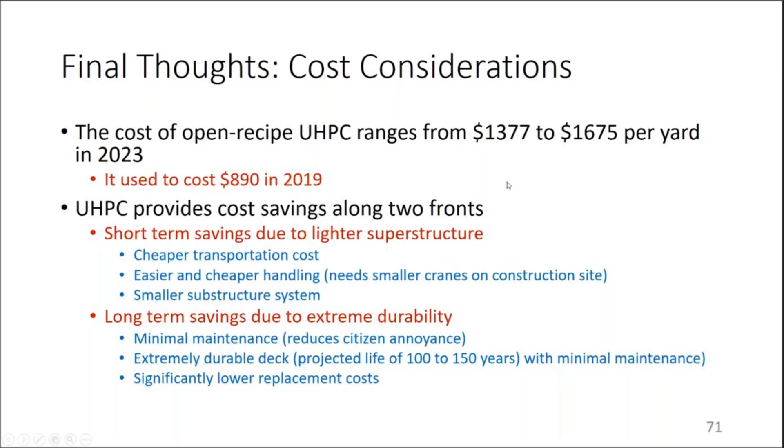So Bill, do you have insight into this? Well, I'll be honest, to get a ready mix truck to do this work was tough to begin with. In Michigan, this isn't used a lot, so we found someone that had old trucks laying around and we could use their truck. We asked the plant if they would mix this material in their silos, and they said not going to happen. They don't know it well enough to trust it, and they don't want to gum up their plant so they can't use their mixer anymore. So to take a leap of faith into a pump truck, man, I don't know. That'd be a tough leap of faith. I mean, you ruined a couple hoses, and what are we buying? I don't know if I'd go that route yet.

Will future UHPC projects from St. Clair County be led in an open tender bid? Good question. Well, we did one project already, it was actually an Every Day Counts project. A contractor did precast units, and all the joint connections were UHPC. So we have done projects with contractor mixed UHPC. It all depends on the size of the project and the scope, and if our crew can handle it.

Will steel fiber be a problem after wearing and exposing, or grinding, or grooving the deck? I don't think there's an issue with that, do we, Sherif? Yeah, I don't believe so. Basically, any fibers that stick out will eventually rust and fall out. When we were at the Third International Symposium, we went to a couple of overlays where the decks have been out there for several years. The fibers are rusted, they've fallen out - some actually still exist after 6 or 7 years. Once that happens, no water is going to get inside. The fibers are protected by the extreme impermeability of the material. So I don't think so.

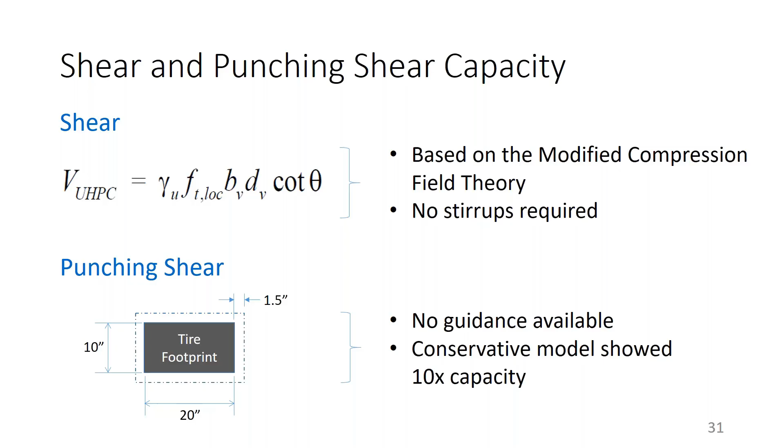Does UHPC exhibit better performance in terms of durability compared to ordinary concrete with a very low water-cement ratio? Yes, and the reason is because of the packing theory used to design it, where the components are designed to fit together very nicely. Because of that, I think it would perform better than any other type of concrete. But obviously I haven't tested the others, so I can't say definitively - from what we've seen, it is extremely durable. I know others on the panel may have tested it for a while. I don't know, Ben, how long you've tested others.

We have, yeah. UHPC is very impermeable, and most degradation mechanisms for concrete that we deal with in the infrastructure world relate to permeability - liquids getting in with salts that cause degradation, or causing freeze-thaw damage. So if water can't get in, the concrete's going to perform better. That's the main reason why UHPC works so well.

Paul, I'd like to go back to the pumping question from a few questions ago, because I've been thinking about that. The concern about pumping is that the fibers might damage the hoses, but you have to realize that these fibers are only half an inch.

They're kind of like this. I really think that as the viscous, thick liquid that is fresh UHPC goes through, it will just slide by the surface and not cause damage to the hoses. That's something people need to experiment with. Just as we managed to convince our local precasters to do this, I think someone should try it out. I suspect it's going to work. So I just wanted to bring that out.

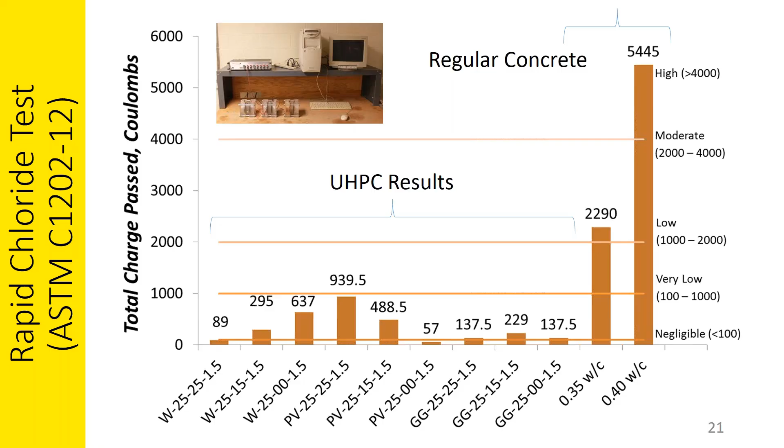Okay, on slide 59 we had a few questions here. Is this the same bridge? I thought it might be a different one. This is a different one. This is the tub girder bridge. The question was, did you increase your slab thickness to get the guardrail on the slab?

I am not as familiar with this as Dwayne might be. Dwayne, do you have a? We did, yeah. There was a design criteria for attaching the guardrail posts through the deck. We precast it with bolt holes in the UHPC, and then there's a bottom plate, and a standard guardrail post with a base plate on it, bolted through the deck. But we did thicken the deck up, I think it's 6 inches on the fascia to meet the crash design.